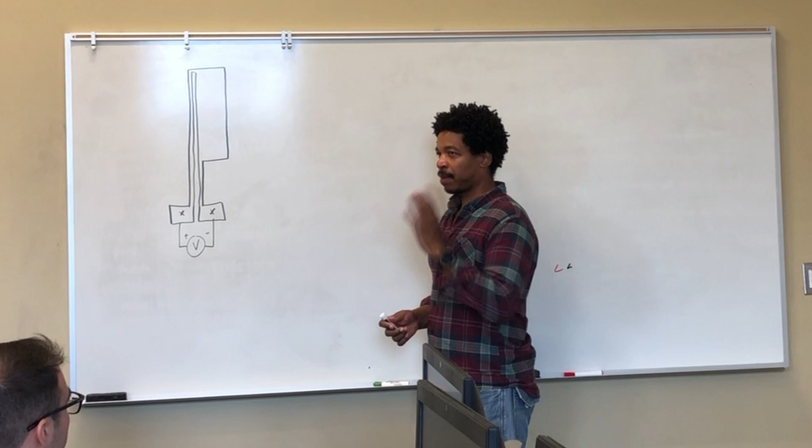But because this is conductive silicon, polysilicon, you're able to send a current through this. It goes around this path, comes back down like that. Now, if you send current through a resistor with a very small cross section, what happens is that material is going to heat up. Okay, so the kind of dimension we're talking about is like this dimension right here is going to be around 2 microns.

Okay, and this beam right here is called the hot arm, and this is called, of course, the cold arm, right? And because this is experiencing a wider cross section as a current goes through here, since you have a higher cross section, then you have less current flux going through this side. Okay, the total current is the same, but the flux is different. Okay, and it comes through here. So this small part right here does heat up, okay, but it contributes less expansion.

So what's going to happen as this beam heats up, it's going to expand this direction. This beam right here, it wants to elongate. This one does want to elongate a little bit. It is receiving a little bit of heat from this side over here, okay, but there is an air gap between those two. But they still call this the cold side, and so it doesn't experience that much thermal expansion.

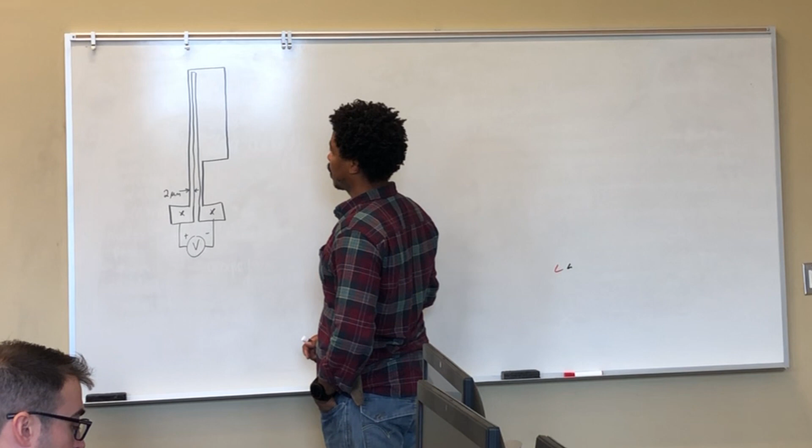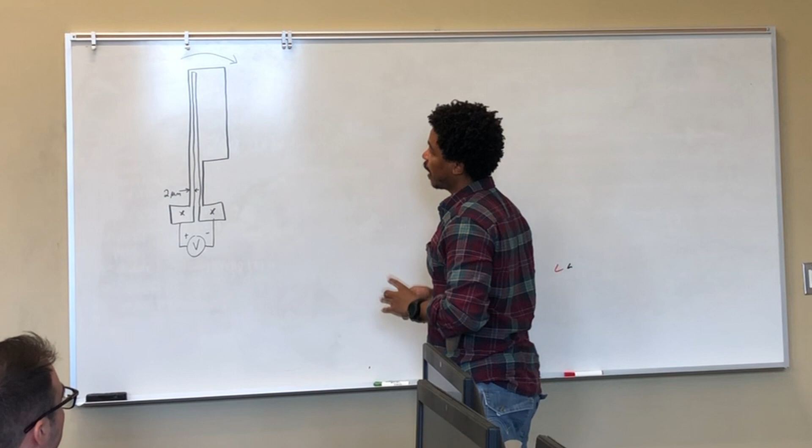So you guys could probably guess what's going to happen as you send current through this thing. Well, let me ask you, which direction is this going to bend, to the left or to the right? Yeah, it's going to be in this direction, to the right. Because, as you guessed it, this side will expand more than this side. If this side expands, the whole thing's going to bend over. Okay, and so that is a thermal actuator.

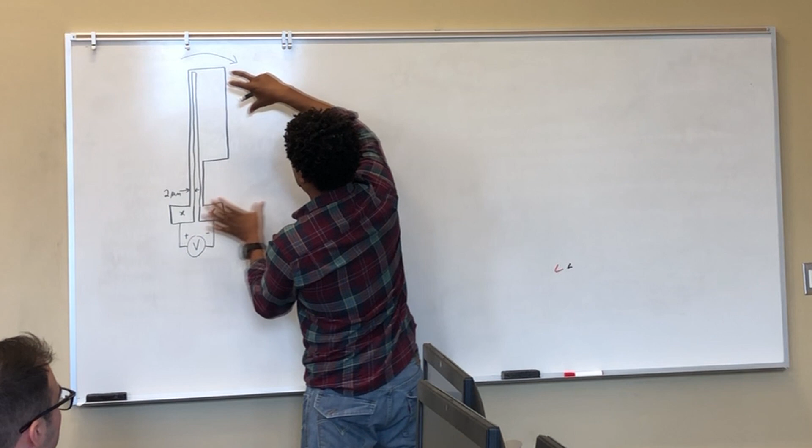Some people, what they've done is chain a lot of these together, where you have another copy right here, another one right here, another one right here, and then they have a beam that connects each one together. So you're sort of like magnifying your force. And it's a pretty substantial force that is caused by that.

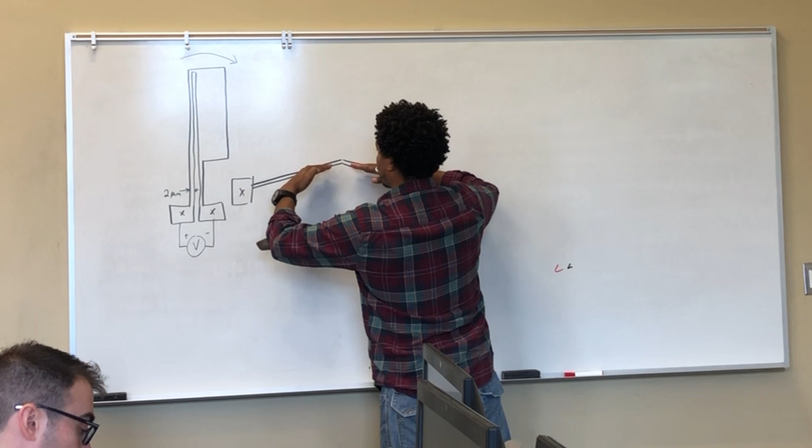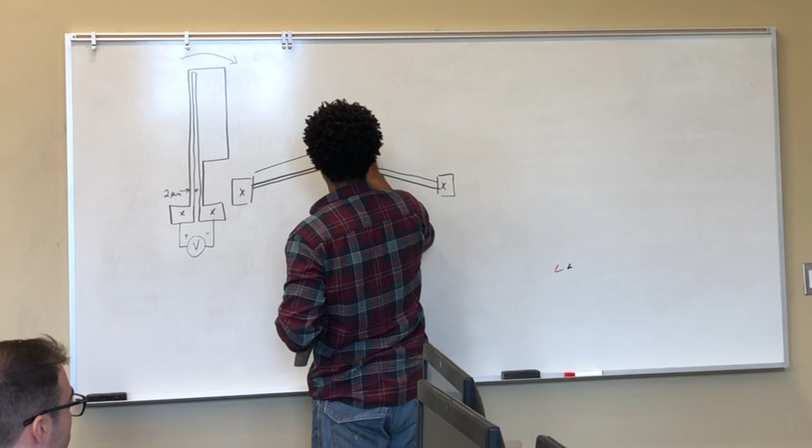Another type of thermal actuator that's very common, some people call this a chevron actuator or a V-shaped actuator. It looks like this. Very thin beam. And then coming down this way like that. And then it's attached to a bonding pad. Okay, and so what happens is when you send a current through this voltage, these will thermally expand, but because it's pre-bent, it has this angle right here, the whole thing bends up like that, okay? And you can have several of them, again, to magnify the strength of your deflection. It doesn't increase your deflection, but it does magnify the force that you're applying if you're pushing on something.

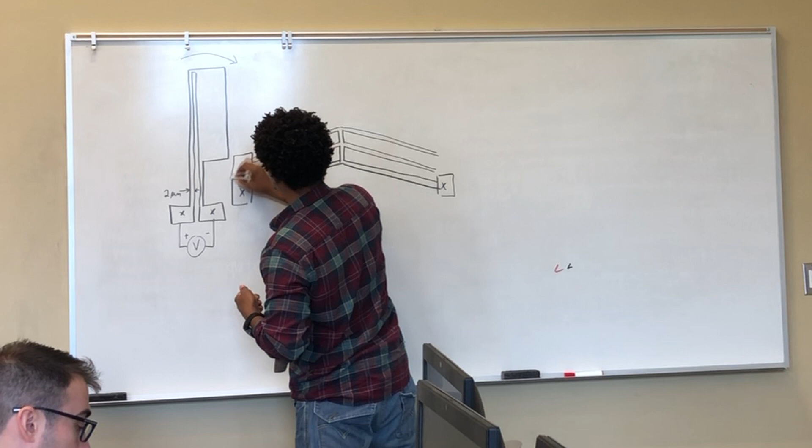Okay, so basically all of these are connected together. And so you're sending a current from this side over to this side, and these currents will heat this thing up, and they'll deflect this direction. So what's interesting about both of these is that you can optimize the deflection per voltage that you put in by changing the gap space. You can modify the gap space. You can modify the width of the beam, right?

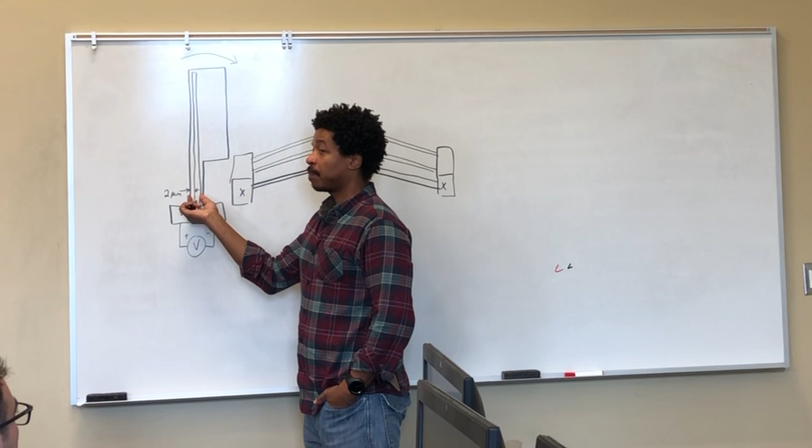You can change the length of this. So let's say instead of having this length, let's say you want it to be a little shorter. So you have this part come down here instead. And so that's something that you guys will play around with after Thursday. And then you'll try to play around, change the parameters, and try to optimize this type of structure. The structure right here, well, this has a certain angle.

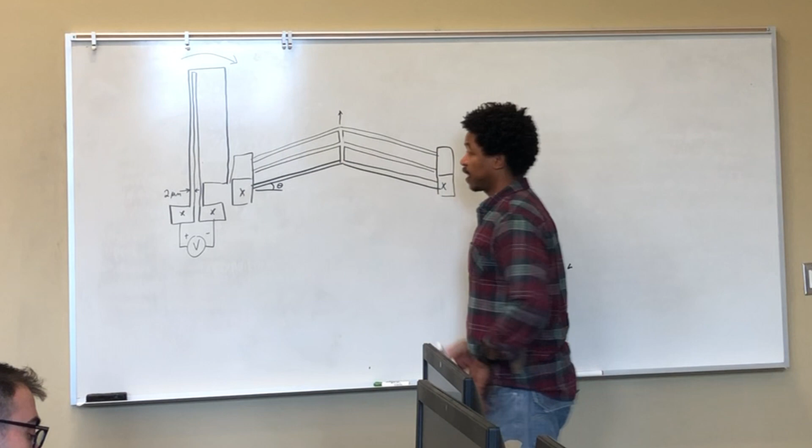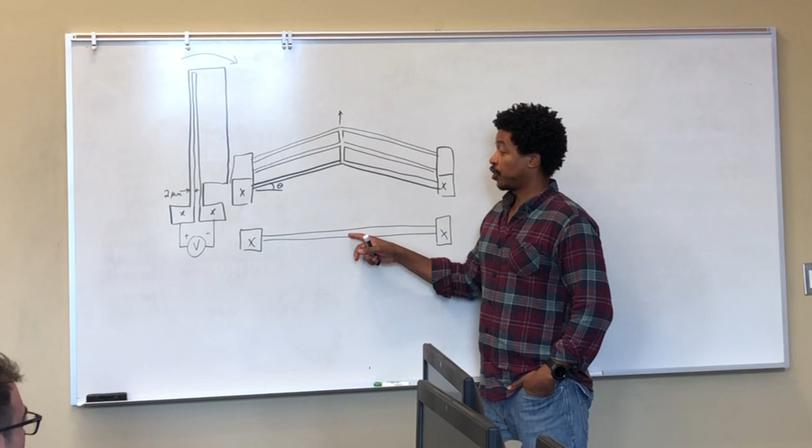And then the question is what angle is this optimized at, right? If the angle is 0, what you have is a beam like this, right? 0 angle. If I were to heat this beam up, and this beam tried to thermal expand, what do you think would happen to this beam? Yeah, exactly. It may buckle. And of course, you don't know which direction it's going to buckle. It's going to buckle up, down, may buckle outward or inward. You have no idea what's going to happen.

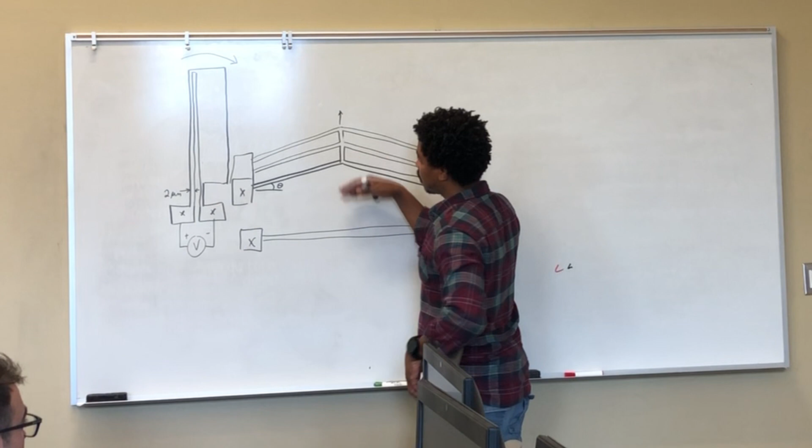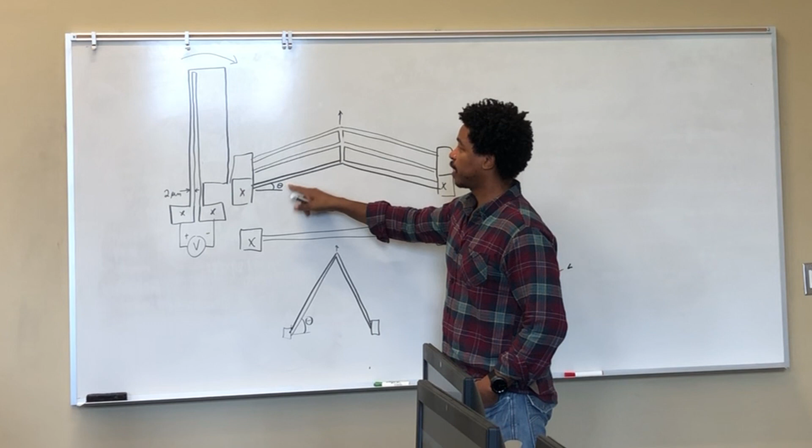Okay, so let's look at this thermal expansion of the beam. Let's talk about a beam here, and let's say this beam is of length L. Sending a current through this beam by applying a voltage across this, you're going to have current and Joule heating, and so it's going to heat up. It's going to increase by some temperature. And the question is how much will it elongate? Let's say it's anchored on this side over here. How much would that elongate? Let's call this lengthening delta L.

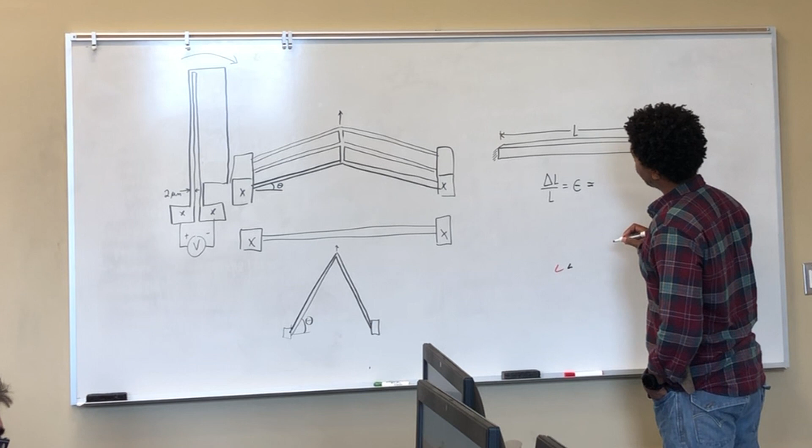So you can say delta L over L, some of you may know that this is equal to the strain, right? And that is equal to alpha times the change in temperature. This is the coefficient of thermal expansion. That's the change in temperature. And the change in temperature is equal to the new temperature minus the reference temperature where it started from. For example, if you started from room temperature and you went above that, it would elongate. If you went below that, it would actually shrink. It would shorten, and you'd have a negative change in L.

Okay, so that's strain. And also, some of you may recognize this equation right here, the relationship between Young's modulus and stress. So here's the strain, here's Young's modulus, here's stress. And the stress is the pressure that's applied here. So this is like the equivalent force over that cross-sectional area, the pressure or that stress right here. And so this is what's happening right here. Effectively, when this thing elongates, it's applying an effective force in this direction, right?

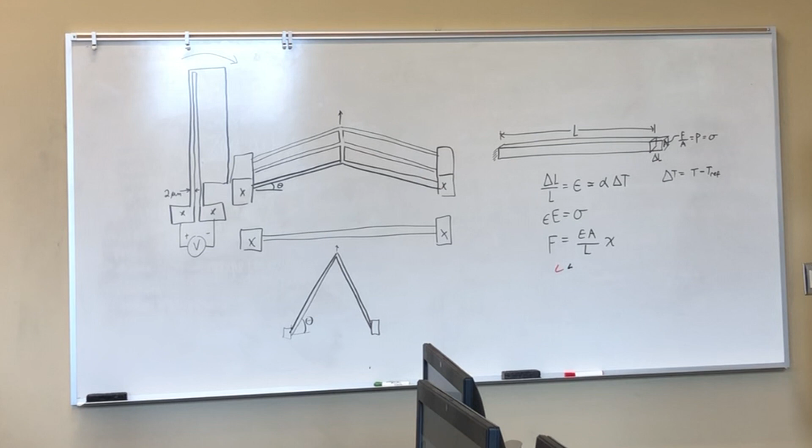And for beams, let's put it in terms of force here. Force equals the Young's modulus times the cross-sectional area A over L, multiplied by its deflection x along the axial direction. We already know that force over A is the stress. So if you divide both sides by A, that A goes away, and so the stress here is E over L times x. Then you can back out what change in temperature took place to elongate that. So this is basically a quick hand analysis of this situation.

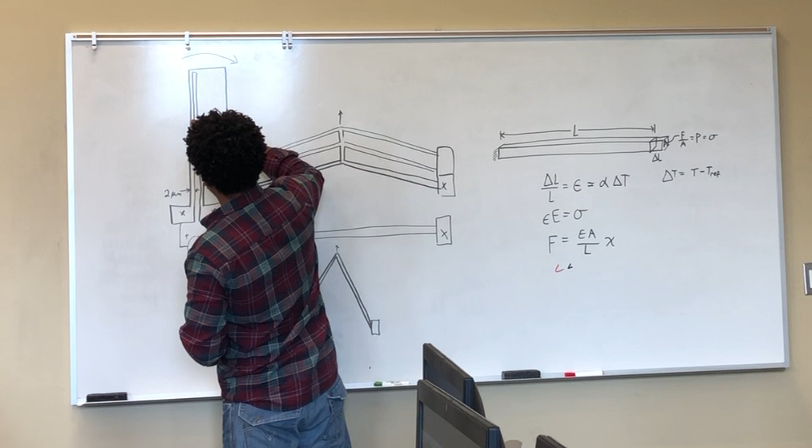When we model it in COMSOL today, we're going to do a little more complicated analysis that's hard to do by hand, right? And we're going to send current through there because that's the realistic thing. When I talked about the change in temperature, this assumes the average temperature along the entire beam. Here, this bonding pad is attached to the substrate, so the temperature here is going to be very different than the temperature here. The hottest part will probably be somewhere around here. It'll cool down a little bit and come around this side. And your simulation is going to figure out where the hottest part is.

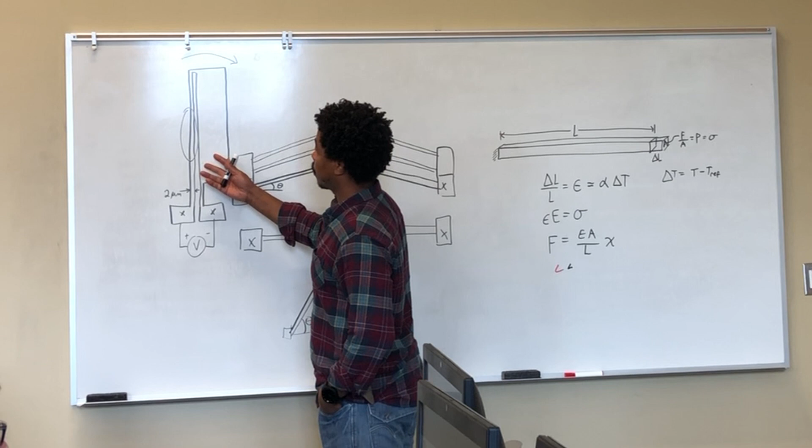And of course, you have to make sure that the current you're sending through doesn't make it too hot, such that it reaches its melting temperature. You want to make sure that doesn't happen. Some people do that intentionally, where they'll make something really small. They attach beams to certain things just to hold it down so it can survive the fabrication process. And then once they have it where they want it, they send a current through to actually sever that beam.

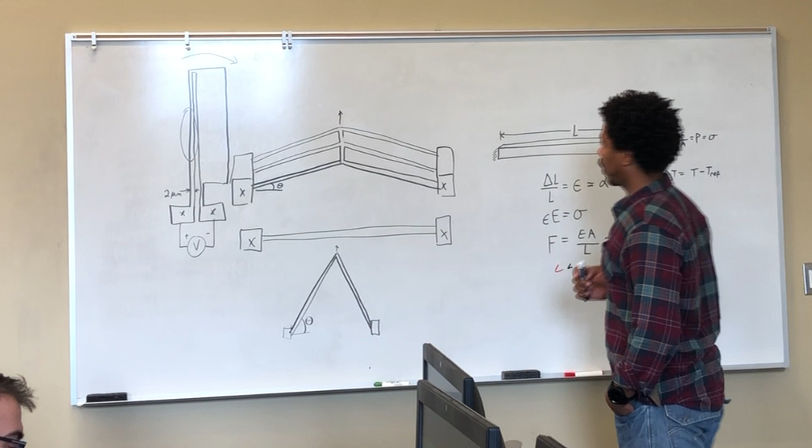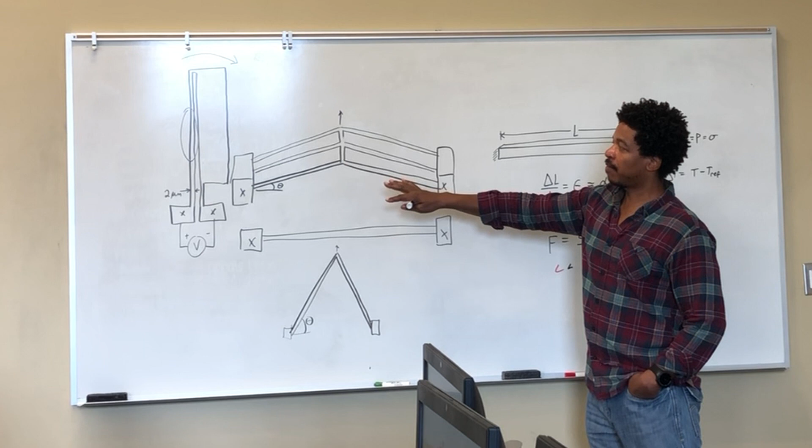The analysis we do today will enable you to determine the temperature at every single point, and it'll enable you to determine the deflection that took place. You'll also be able to play around with the parameters. That's an idea of the assignment I'll give out on Thursday. For today, what we're going to do is model.

It's the same type of physics, but applied to a different type of structure. So the structure looks like this - it's just a simple beam. I'll try to make it in 3D so you guys can see what I'm talking about.

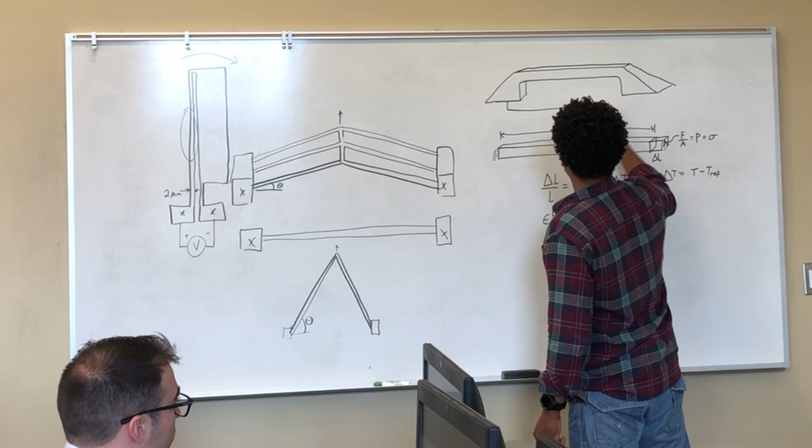So it looks like this, and you're going to put a voltage across that, and send current through this right here. What's going to happen is that this experiences thermal expansion, right? And because of that, this beam is going to do something similar to buckling. I wouldn't really call it buckling, but it is going to bulge out, and it's going to preferentially bulge out in this direction only, upwards, because there's a moment arm associated with it since it's attached to this.

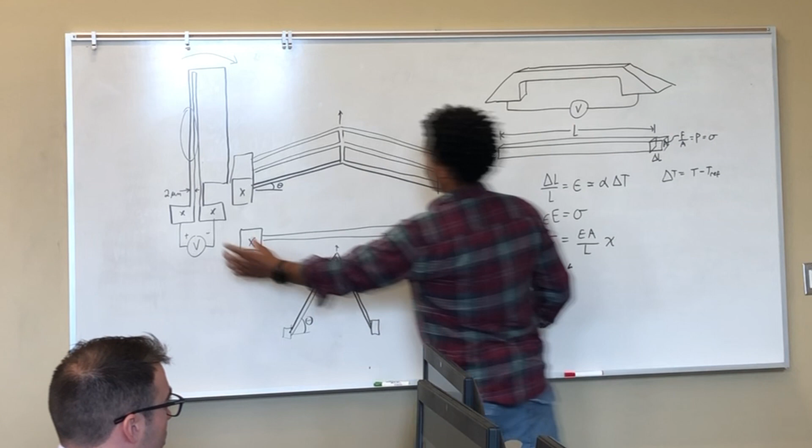So you'll be able to determine what the temperature is all along this right here, and you're able to see the deflection. But this example of what we're doing today is you're going to apply the same physics to a different geometry. The only difference here is geometry - instead of applying a voltage to this stuff, you're going to be applying your voltage across these pads, or in this case, across these pads instead.

Okay, so how's it going? Oh, okay.

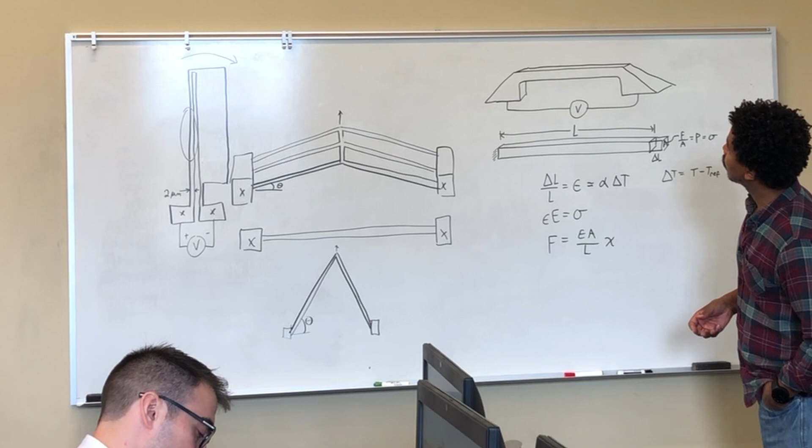So does anyone have any questions about any of this stuff over here? Thermal expansion - it is using multiple physics, right? It has structural mechanics, it has thermal expansion, it has current - you're dealing with current as well, so electromagnetic. Thermodynamics, and also structural mechanics. So 3 domains. Start up COMSOL if you haven't done so already.

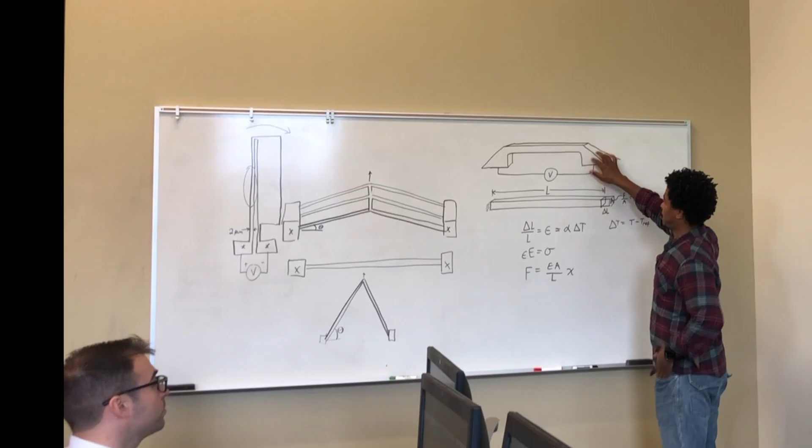So let's go through this. A few interesting things we're going to learn how to do here: this geometry right here is going to be kind of interesting because we're going to learn how to make this geometry by making 2D models. We're going to take two 2D geometries, extrude them, cross them together, and then just keep the intersection. Those geometries are this right here - so this is like one 2D geometry we're going to keep. And this is the same thing, like if you were looking this direction from up above, like that, that's what you would see. But if you extrude it, then it's just a block that doesn't get this.

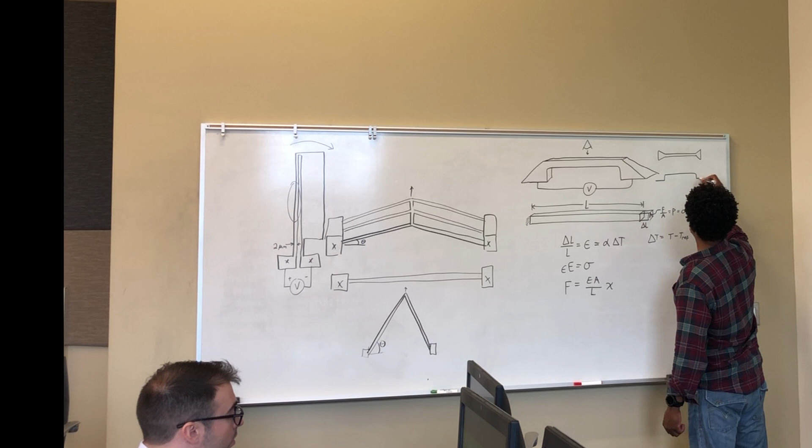But then we're going to have this other geometry that looks like this - so this is another 2D geometry. And that's like looking this direction only into the board, and that's what you would see. We extrude that, take this, put it right on top of that after doing the extrusion, and then we do the intersection, and we get this 3D structure. So that's another really interesting way to make 3D structures - looking at different angles, orthogonal angles, and then doing the intersection. So that's something interesting.

Another interesting thing is, okay, we can do our geometry freehand, but we're going to use vectors. We'll basically just put in the points there, and there's a lot of them. So you'll see that, and then we'll look at the analysis when we're done. We'll look at how the temperature is scaled, and we'll plot the displacement.

Okay, so let's get started. Go to Model Wizard, and this time we're going to click 3D. Even though we're starting off in 2D, you have to click 3D because you're going to end up in 3D. So click 3D, then go to Structural Mechanics, expand that, go to Thermal Stress, expand that, and go to Joule Heating and Thermal Expansion. Then click Add.

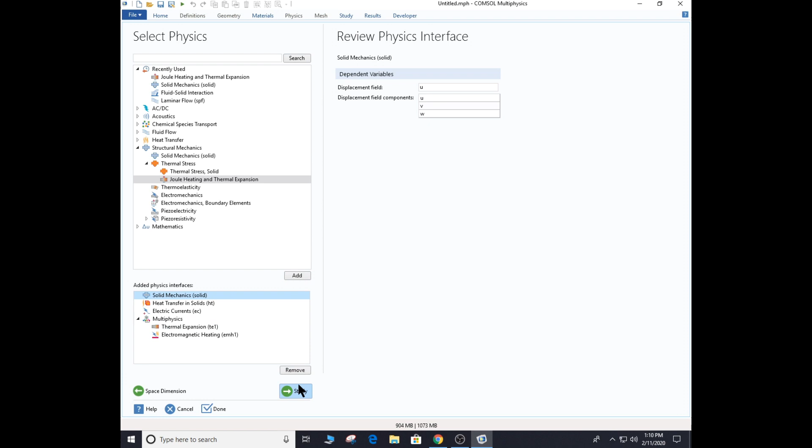Okay, now go to Study, click that, and we're going to do Stationary Study this time, and then click Done.

Okay, so here we are. The first thing we want to do is define some parameters we're going to use for our model. So there's going to be initial voltage, initial temperature, and some external temperature that's far away, which is our reference temperature. And also there's a heat transfer coefficient that we have to worry about. So click on parameters, this opens up, and let's start keying in this stuff right here.

So V0 is going to be the voltage expression, and you tab over, and then that's going to be 0.2 volts, and in your brackets you put capital V for the units. Okay, and that's square brackets.

The next thing is your initial temperature. So T0, tab over, and that's going to be 323 Kelvin. So 323, and in the square brackets, put capital K for Kelvin.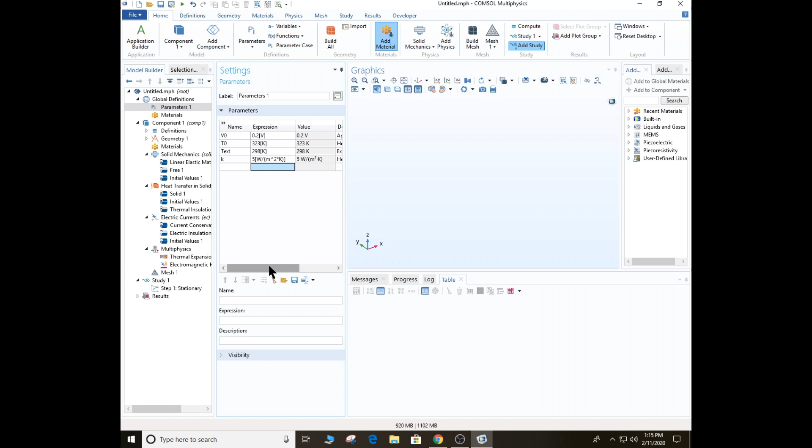Okay, so those are our initial parameters. So the next thing you want to do is go to geometry, and to make things easy for us, instead of always dealing with meters, change your geometry. After you click on geometry, change it to microns. And that'll mean that all the plots will show up in microns, and all the entry data points will be in microns. We don't have to put like E-6 everywhere.

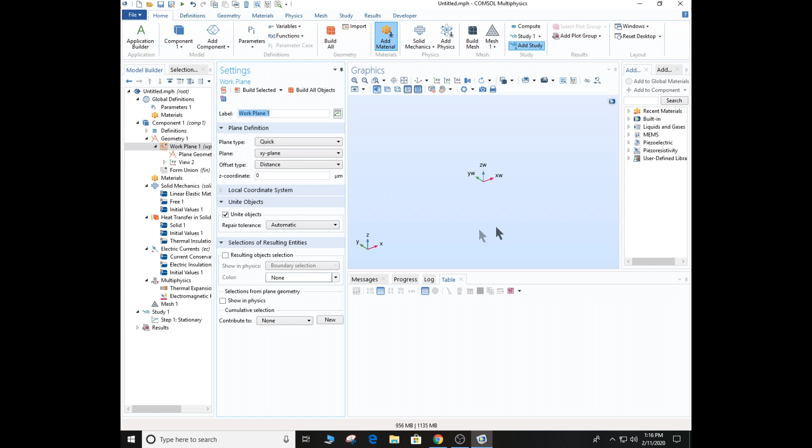Okay, then go to geometry again, and then right-click on geometry, and then click on work plane. So we're going to have two work planes. Here's the first one right here. So you click on work plane, and then this pops up. And so for this right here, go to the plane geometry. So this is it in 3D, but we just want to see the plane that we're going to work with. And as you can see here, it's in microns, micrometers, which is good.

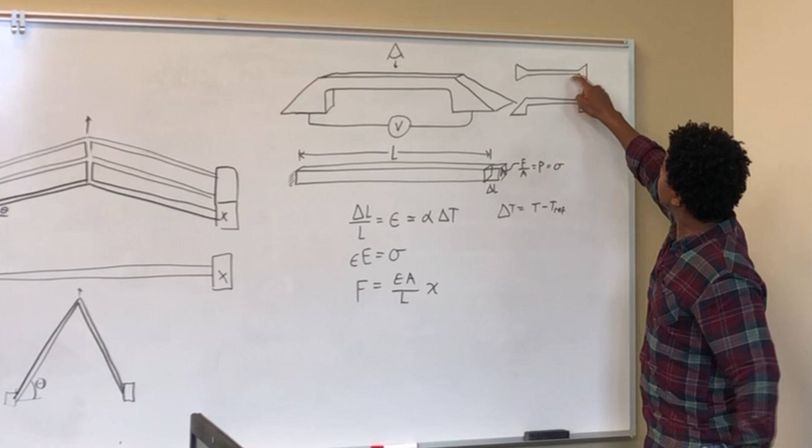And so go over to plane geometry and then right click on it. And we want to enter in a polygon. Okay? That's that first structure. We're going to put this in first. Okay, so we're going to put it in by coordinates this time instead of, I mean, we could just draw it, but we're going to put it in coordinates just to give you guys a different flavor. We're going to put it in terms of points, vectors, okay?

And we're going to put in all the x coordinates and all the y coordinates, okay? But the coordinates are kind of weird, right? So basically, we're going to put it in pairs. Like if you have x and y, we're going to have x1, y1, and then x2, y2. So they're sort of like this. This creates one segment from here to here.

Then we're going to have another pair, but this next pair starts off from x2, y2, then to x3, y3. This is like another segment. And because these two points are the same, they're connected right there. That's how we're going to make our segments, so you'll see lots of points repeat. So you have here to here, then here to here, and another segment going from here to here. It's like that all the way around.

Same with that, except these are curved. It's not an accident of my penmanship—these are actually curved. We'll make these a fillet.

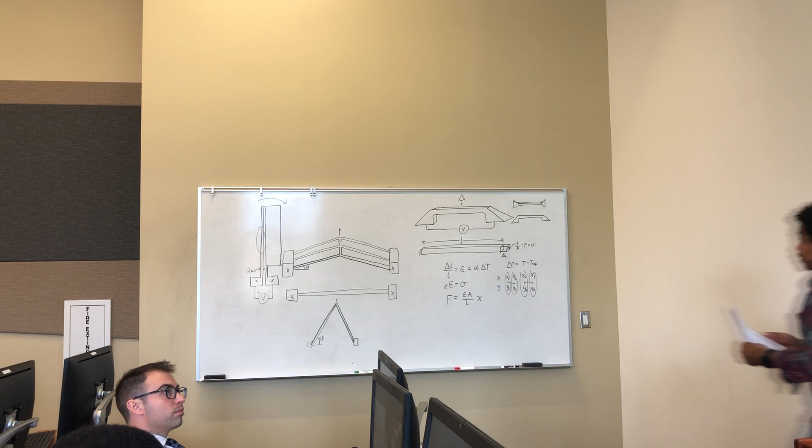Okay, let me write down what you put in because you guys probably can't see it. So I'll put in these coordinates over here. For x, you put in 1, 0, put in 2 5s, you put in 2 18s. Comma separated or spaces—either is fine, COMSOL will take spaces or commas, however you like. And then you put in 4 23s.

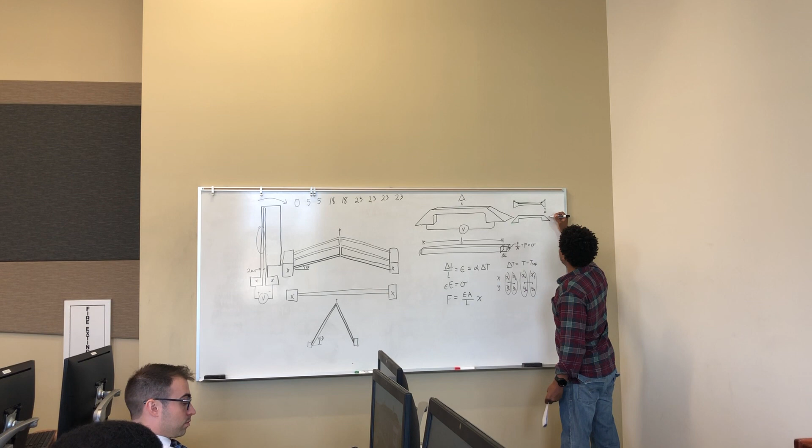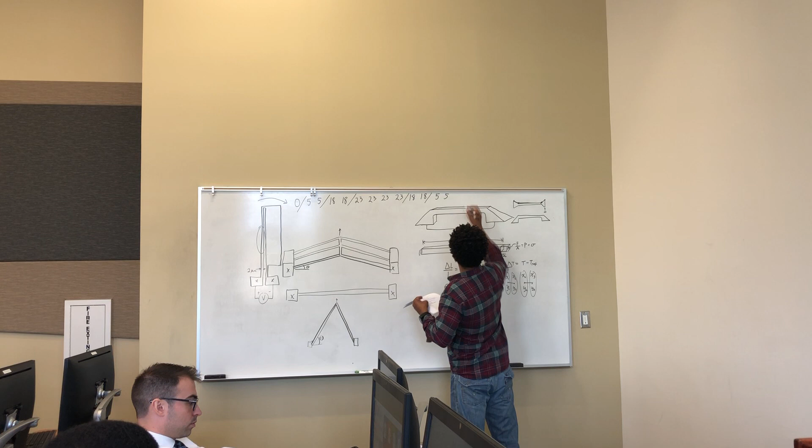So you guessed it, this right here is 23. That's why there's 4 of those, and 2 18s. I'll break these up to make it easier to see, I suppose. And 2 5s, and 3 0s. Hopefully you guys can see that.

That goes in the X entry point. For the Y entry point, we're going to have 1 0, 4 1.5s, and if you guys want, you could probably copy and paste. Once you type in one of the 1.5s, you highlight it, Control C, and then do Control V 4 times. Hit the 4.

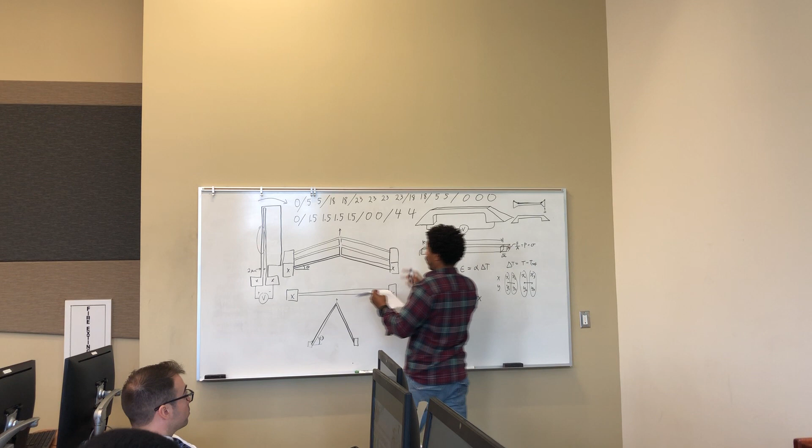2 zeros, 2 4s. I'll continue this down here: 1 and 2, 3, 4. 4 2.5s, and 2 4s, and 1 0. So all this stuff right here corresponds to Y, and all this stuff right here corresponds to the X.

Okay, after you're done with that, build all—hopefully it looks like that. I gotta do it now. So: 0, 5, 5, 18, 18, 23.

I was worried I didn't copy one of the points down correctly. Yeah, it'll complain if they don't have the right number—like the number of y's have to equal the number of x's, of course.

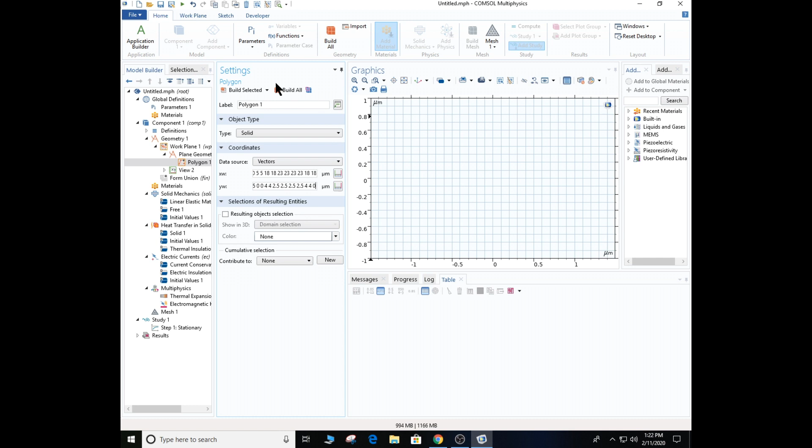Yeah, and then do zoom extents to see the whole thing. Okay, so it should look something like that.

Okay, cool. All right, so let's go to extrude. The extrusion is not on 2D, it's in 3D, so we have to go back up here to the 3D, highlight, right-click on geometry, and then go down to extrude. Okay, and then we're going to extrude this. You highlight the thing you want to extrude, and extrude it up 3 microns, and then do build all. It should look like this.

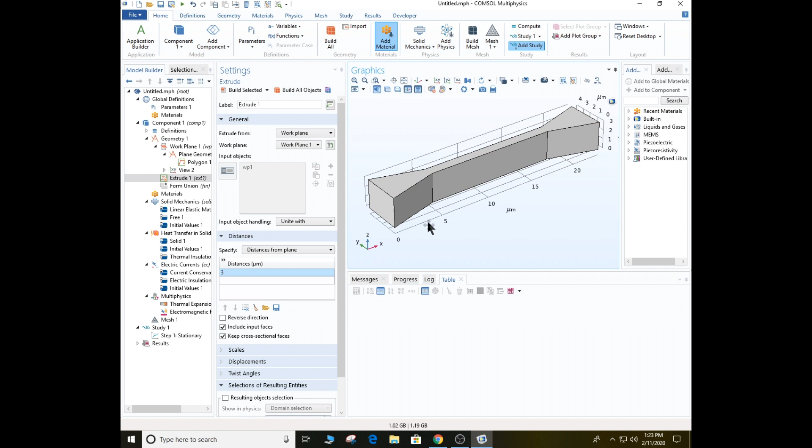So next we want to do the next one. We just did this—we extruded it. Now we're going to do this one.

So we go back over to geometry, and we're going to put in... oh wait, first, okay, yeah, this is going to be interesting. So we want our next geometry to line up with this face here, and extrude from this face that we're going to place out to here. That's going to help us with our overlap. So I'll show you how to do that.

So go back to your... let's see here. Yeah, go to your work plane, and for this right here, go down and put face parallel in the plane type, because you want your plane to be parallel to some kind of face, right? And you click on this one right here. Oh, wait a minute, that's not right. Oh, what just happened?

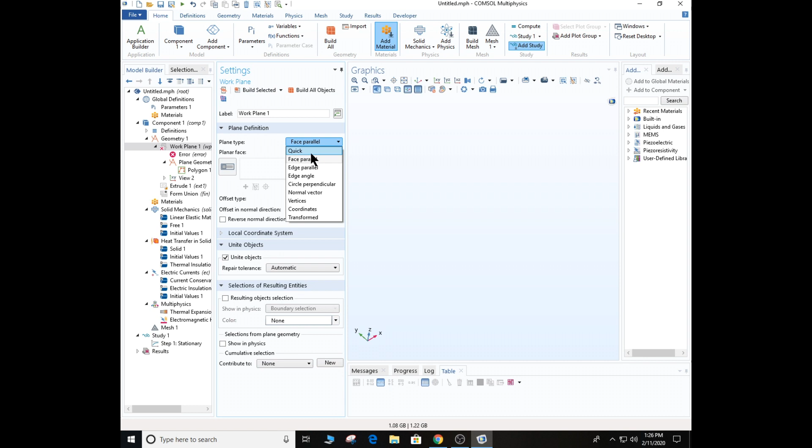So I have that—geometry. Oh, I heard, yeah, this is supposed to be a new work plane. Yeah, my bad. Okay, so whatever you did, yeah. So go back to geometry and click on a new work plane, and then for this new work plane, you go to face parallel.

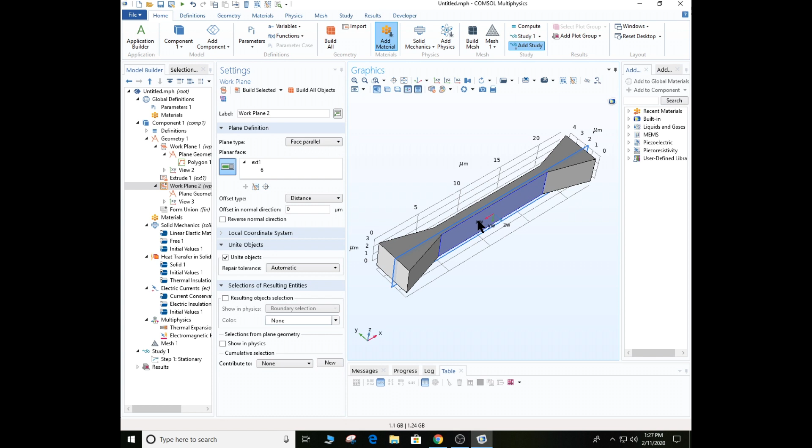And then you click on your face, and it should look like that. You guys got that? Everybody? Good, okay. Huh? Oh, and the last part? Probably got to hear because you get what I did. Oh, yeah, yeah, so go back to that. And go to.

Okay, so as you can see, that plane is intersecting that face right there, but we want to extend it out to here. Okay, so we're going to displace that. So go to offset right here, and then click in here negative 1.5 to offset it, right? If we do build all, it went that direction, but we don't want that direction. So you want to click on reverse normal direction, and then it'll put it where you want. And as you can see, it's flush with this side right here. You guys see that? That's exactly what you want.

And so we're going to build a geometry on this plane here, and then extrude it through the Y direction. Okay. Oh, yeah. So here's the difference between reverse. It gives you a different kind of positive sense, right? So if you click back and forth, it's like that. Like, are you going 1.5 microns this direction, or 1.5 microns out that direction? And that's what that does. It gives you a choice of what direction you want to go.

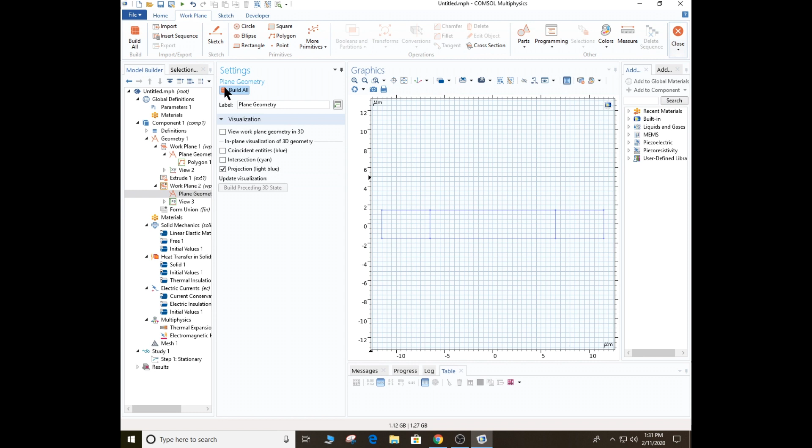And then turn off that and turn on this. And these are coincident entities. And I'm not sure what that is. Okay, but anyway, so let's go to projection. That's the only one we need. Okay, and we will go to view the plane here. Oh, wait a minute. Yeah, so what we'll do here, right click on plane geometry, and then click on polygon. And we're going to do the polygon again to make this other structure. And I'll write it down again. Okay.

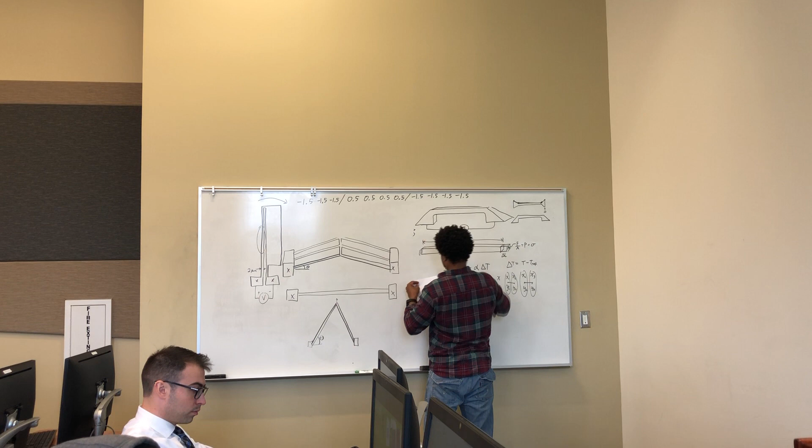So our new numbers are going to be 1, 2, 3. There are 3 negative 1.5s. Okay. There are 1, 2, 3, 4. There are 4 0.5s. There are 4 negative 1.5 again. This time 4 instead of 3. And there are 4 1.5s. And last, we only have 3 over there. Here goes the last one, negative 1.5, one of those. That's going to be the x's.

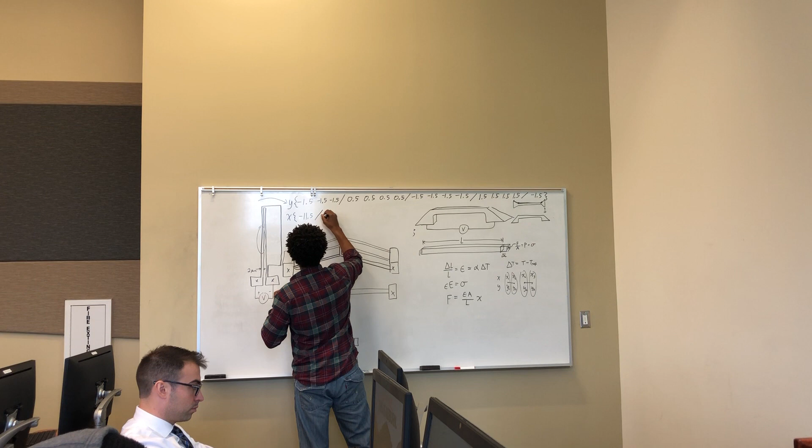And then we have 4 positive 6.3s. Okay. Then we have 2 11.5s positive. And then 2 positive 6.5s. And 1 negative 11.5. And it should look like this without the fillets when you build all. Anybody got lucky? Oh, wait a minute. Did you guys put this in vector form? Yeah. Okay, thank you. Glad you remembered that.

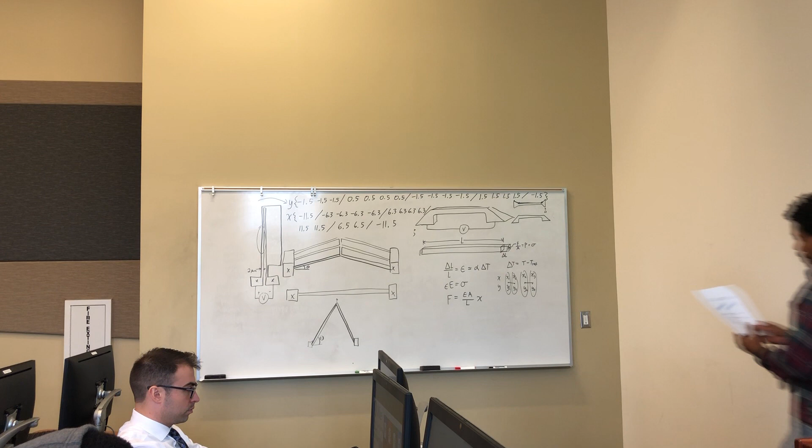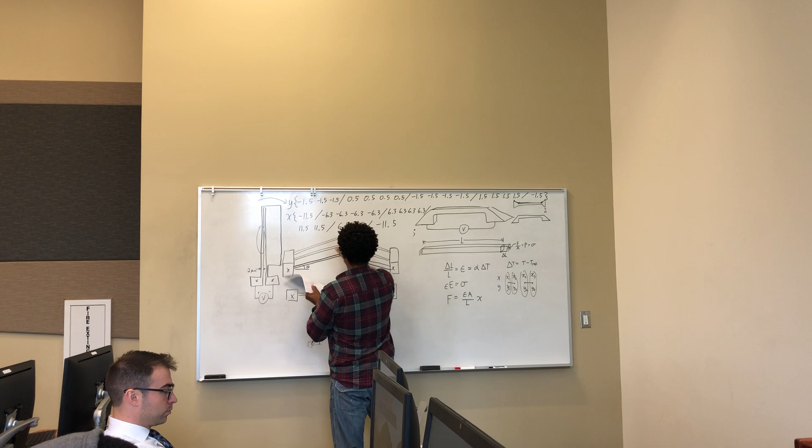Okay, negative 1.5 times 3. Yeah, same. Everybody's getting an error? Let me check my numbers, maybe I'm missing something. For the x's, like that. 1, 2, 3, 4. 1, 2, 3, 4 this. 1, 2, 3, 4 that. 2 11.5s. 2 6.5s. I did miss something. There's supposed to be 2 things here before the negative 11.5. There's supposed to be 2 negative 6.5s. Yeah, this is a problem if you don't have the right number at the top. Okay, so how's that? Still errors? You're right. Okay, great. Glad that was the only error.

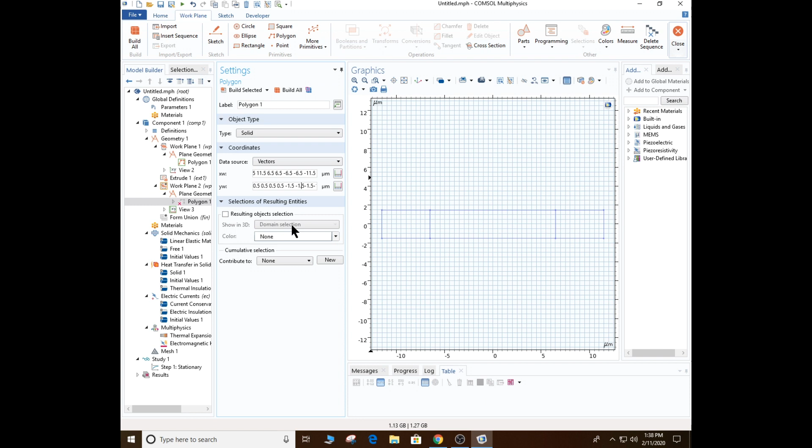I have a little bug in mine. I'm trying to find out where that is. 1, 2, 1, 2, 1, 2, 3, 4. I didn't have a space between one of my things. There we go. Okay, so I finally caught up with the rest of you guys. So this is what it should look like.

Okay, when you do build all, and then next we're going to go to fillets. So right click on plane geometry for work plane 2, and then go down to fillet, and it'll add that there. And what you can do is come over here. All the vertices are now dotted, and so you have to select which one you want. So you can do a select box and highlight these middle 2 like that, and then they appear over here. So 4 and 6 of mine are what those middle 2 are.

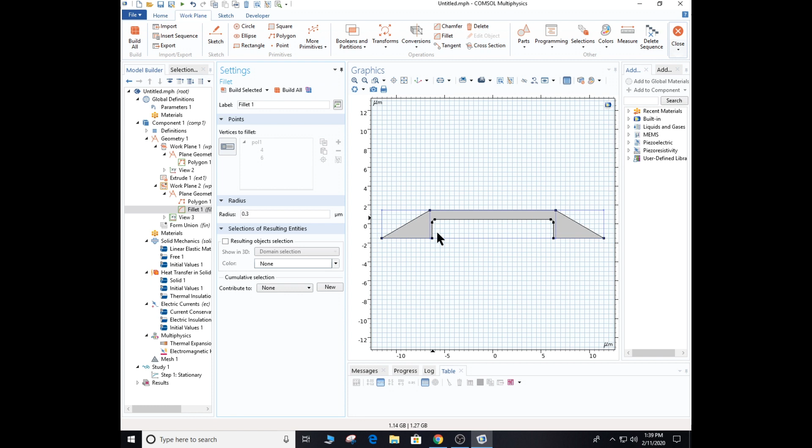And then the radius of curvature is going to be 0.3 microns. Okay, then you do build all, and then you can see they made those curved. Okay, and next you go out to geometry again, and you right click on geometry, and you want to extrude it. So we're going to do extrude, and this is the one you want right here. Oops, I'll click it again. So this is the one you want, and you want to extrude it for 4 microns. So from this distance to over here is 4 microns, and so you say build all.

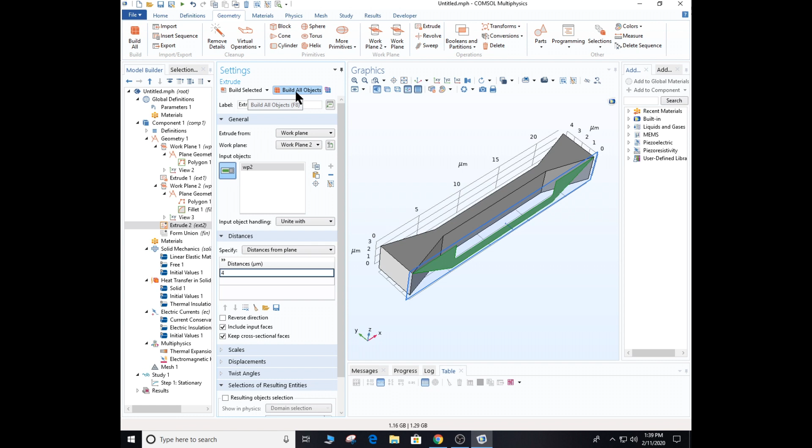-4 on mine. I must have changed my, yeah. Okay, so it's either 4 or -4 microns, but it should look like this. Okay. Next, what you want to do is you want to do a Boolean. So you go to your geometry, and you go down to Boolean, and then you go to intersection. So this is where you get the part that you want,

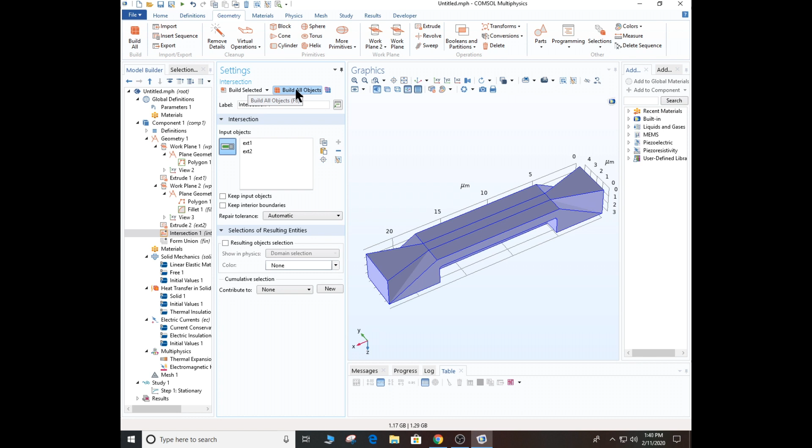and you just click on the things you want to do intersections with. Both of those, you can do Control A, and you don't have to keep the interior boundaries. And then you can say build all. And so it should look like this once you get done. So how are we doing out there? Everybody got this? You can also go to Form Union and do build all there too.

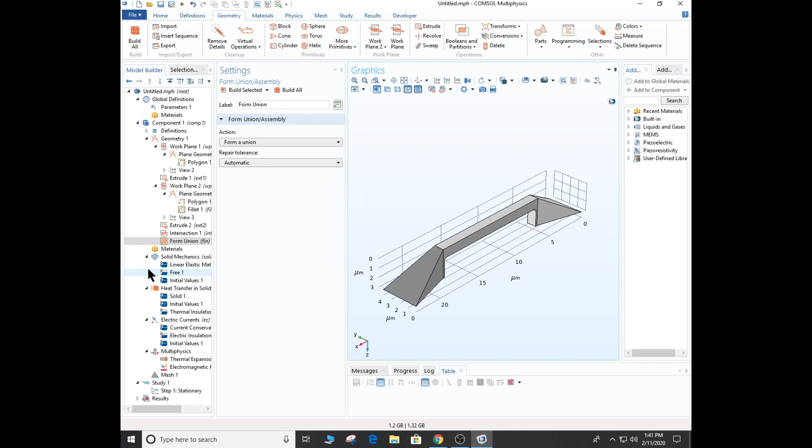Okay, so now what we're going to do, this is something that you guys can do to try to name some of your boundaries. You can name them, right? So these bottom boundaries right here, those things are connected to the substrate. So we're going to call one of them connector 1, another one connector 2, and then we're going to call both of them just connectors. So that means that you can select them, and they will appear in a drop-down list, or you can just click on the boundary if you want to. So it's up to you, but you can give names to your boundaries, and sometimes that makes it a whole lot easier, especially when we start building your standalone apps.

Okay, so let's go down to definitions, which is right here. You right-click on it, and then you go to, where do you want to go? Oh, selections, explicit. You want to explicitly define a selection. And we could pick domain, but we're going to pick boundary. You can also pick an edge or a point and just name anything you want. So for this first boundary, this is the one we want right here. And we're going to call this connector 1. And as you see over here, it's now called connector 1. If you expand this out right here, you can see that's called connector 1.

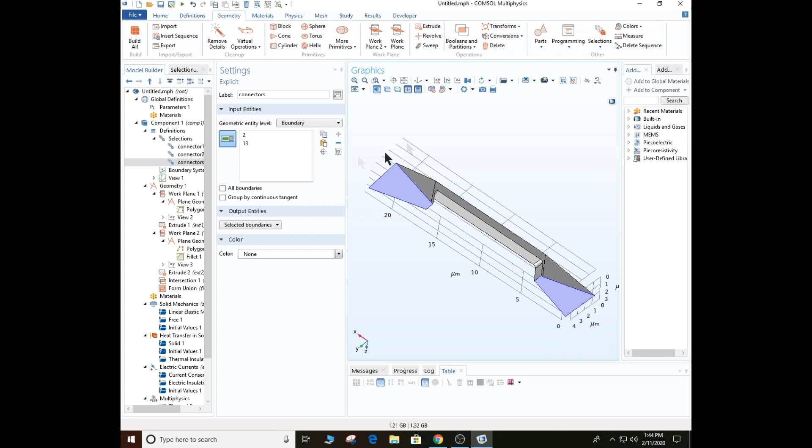Okay, so once we're done with that, then we're going to add our material. We're going to make it copper. So you can go to home and you can go to, where's add material? Oh, right here, add material. Oh, it's already showing. So add material. Go down to choose MEMS. Go down to metals and then choose copper. And then click here, add component. So you can either double click on it or you can click it once and just say add component and it'll pop up over here.

Okay, but one thing it doesn't have yet that you have to tell it is the relative permittivity. And for now, we're just going to call that 1 for our relative permittivity. Okay? Everybody got that?

Huh? I don't have the relative permittivity combined with that at all. Oh, but you have all these other things? Yeah. Wow. Let me see yours, what yours looks like. You took copper and MEMS, right? Added a bunch. Oh, you did? Yeah, so these added. Oh, okay. Okay, so that's relative permittivity, right?

Also, let's go to material properties, and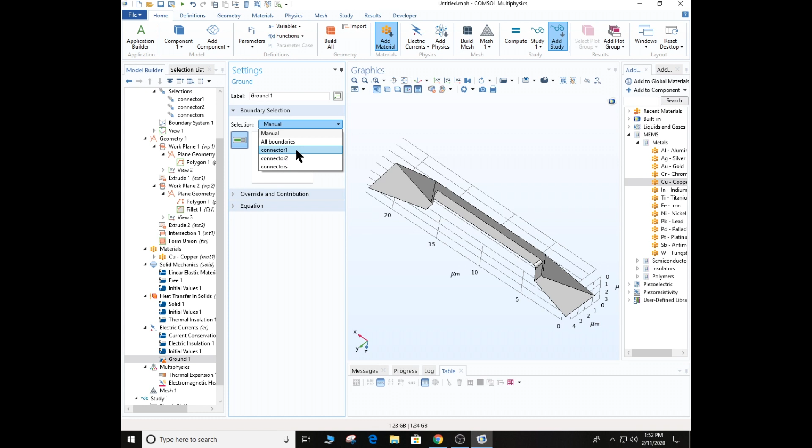Okay. Now for the next thing, let's go over to electric currents, and then we're going to tell it which thing is the ground and which thing is receiving the voltage. So right click on it, select ground, and then go to here, and you can see what connectors you have. Remember, those are the ones that we labeled before: connector 1, connector 2, and connectors. So select connector 1, and that's going to be our ground.

Let's go over to electric currents again, right click on it, and this time choose electric potential, and then go over here to select connector 2 for the electric potential. And since that's not 0, we'll put in what we chose, which was V0, and that was our 0.2 volts that we created in the parameter section.

Okay, so now let's go over to the multiphysics section down here, and let's go to the thermal expansion part. Okay, now here what we'll do is we'll go down to model input right here, and for this we'll say user defined, and right here we'll put in our T external, and that's a parameter that we had defined. Otherwise we could just type in the number.

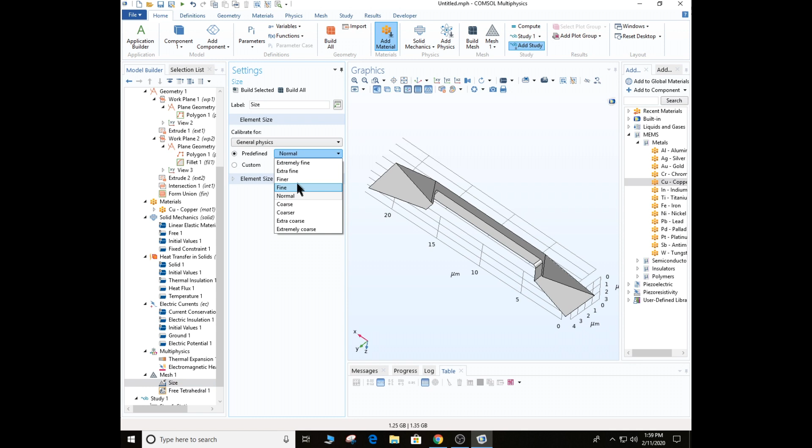Now let's go to our mesh down here at the bottom. So right-click on mesh and do our free tetrahedral. But first go into size, and the kind of size we want is going to be finer. Not fine, but finer. And then say build all, and it'll build the mesh for you. It should look something like this. Okay?

Now we can just do our study. So go down to study, click on that, and then click on compute. And then in a few seconds, hopefully, you got a result. So here's what this result looks like over here. And you can see that it bulges up.

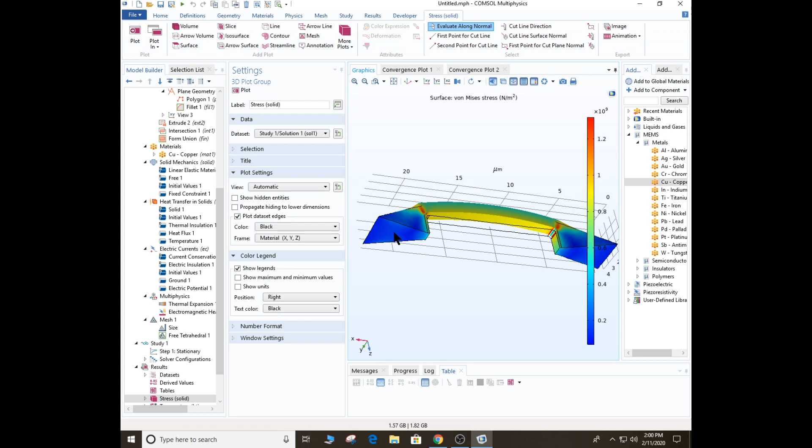Okay, so remember, this over here is ground. This over here is at 0.2 volts. Both temperatures here on these bottom boundaries are at temperature T0. However, the temperature all throughout here is determined by the current going through here. What's being plotted is von Mises stress.

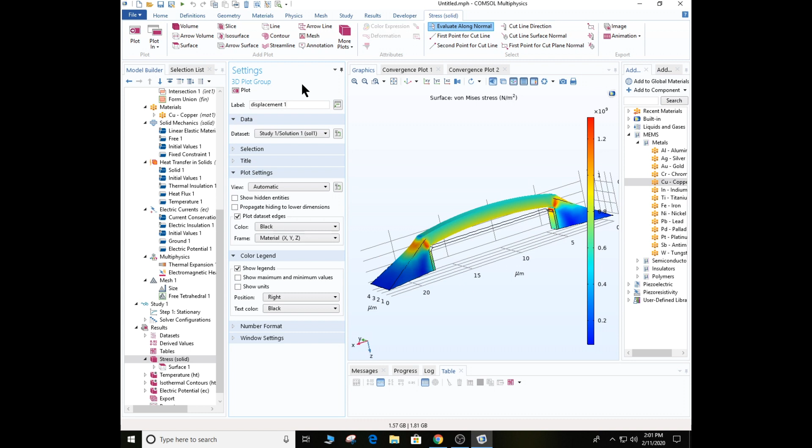Okay, so we're going to change that a little bit. So let's look at stress right here. Let's go to surface, and oh yeah, we're going to do two studies. So let's call this first one... wait a minute. Okay, so go back up to stress solid. Instead of labeling it stress solid, let's call it displacement study 1, or displacement 1. And we'll have another displacement 2 when we go back and change the alpha. Okay? And once you do that, it should change this to displacement 1.

Then go down to surface right here. And you want to go to... where do you want to go to? We're looking for something called replace expression. I lost my bearings here. So we go to results, displacement study. So if you go back and replace expression, then there's a button up there. Where do you see that? You go to surface. Uh-huh. Click on that, and then there's the red-green arrow button. Ah, yes. Thank you for that. Yeah, forgot about that.

Yeah, so if we go to that, go down to solid mechanics components. And then click on displacement, and then click on this one right here. So this is telling COMSOL to plot displacement instead of the stress. Okay, you can double click on that. And then you can say plot. And now, as you can see, the plot has changed. Now it's plotting displacement. And in fact, if you click anywhere on this structure, it'll show you the value of that displacement right here. It tells you the coordinate and the value on the plot. Okay.

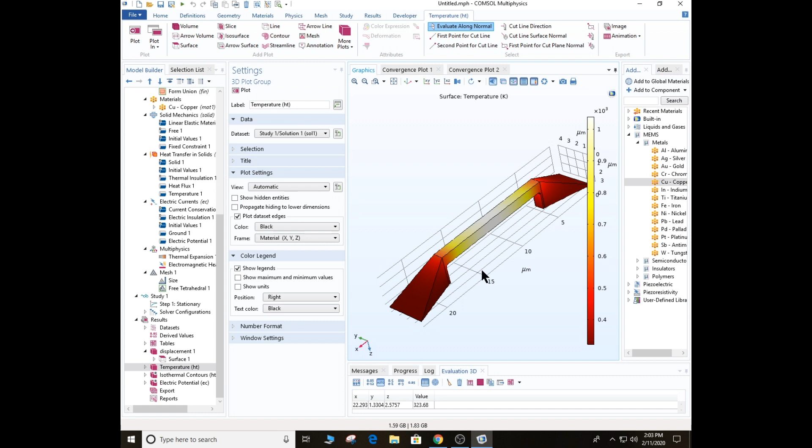Okay, so now we want to show what the temperature is. So let's go down to temperature right here. If you click on that, it'll show you what the temperature looks like. And you can click on it. It's hottest in the middle right here. So it's 1,000 degrees K. Over here it's like 323 K. In here, 323 exactly. Because remember, those were our boundaries that are connected to the substrate.

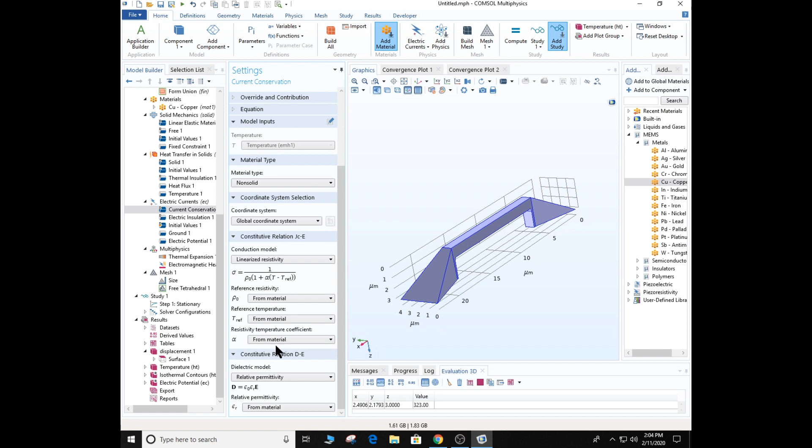And now let's go back to our electric currents right here and change our alpha. So go to currents, go to current conservation 1, which is right here, and then scroll down to alpha, and then say from material instead of user defined. And then go to add study. Did it add it? Oh, add study. Okay. So when we say add study, this new thing pops up. We say stationary, and then we click on add study. So this is going to be another simulation. And then we come over here and say compute.

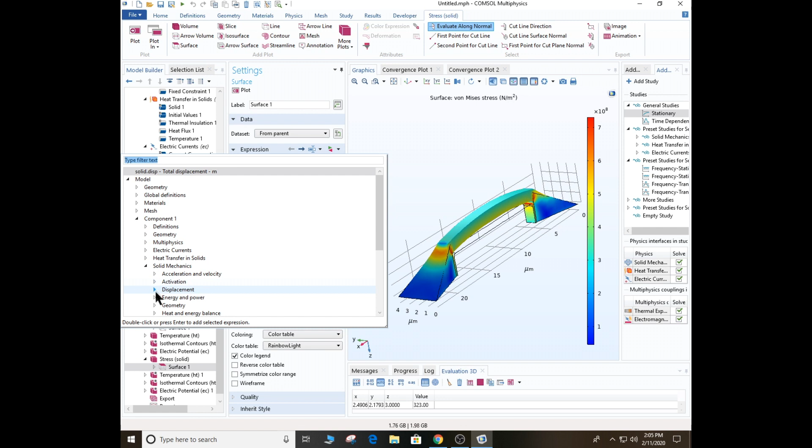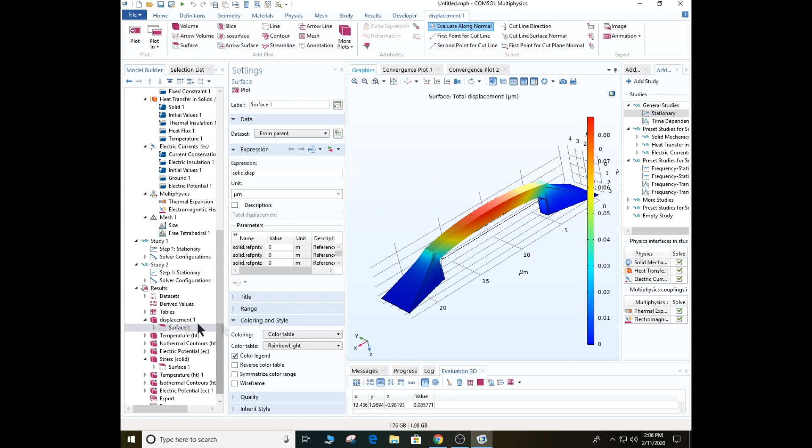Okay, so this is what we get for that. And again, if you want to go down to the surface, click right here, and then you want to do the geometry again. You go to solid mechanics, you go to displacement, and you want to plot total displacement. Double click on that, and then you say plot it. Then you'll see what this is. So this is the displacement with alpha being chosen by the material. And if you click right here, you see that the deflection is not as high as the other one. If you click on this surface, you get a different value. Okay?

And of course, what you can do here is call this displacement 2, just to make it clear. So displacement 1 is up here, displacement 2 is right there. And you can also look at the temperature as well, and those are also different. This value for temperature is 1038. Right here for temperature, we get like 705. A little different. Okay, but this is a more accurate model where that coefficient really depends on the material, because it's a function of temperature. Okay.

Anyway, that's all I have for today. Again, everything we did here, I hope that you can see that you can clearly apply it to this or this. The only difference is it has different geometry. That's it. Okay? But everything that we did here can be applied to those two things. But again, that's not until Thursday for that assignment.

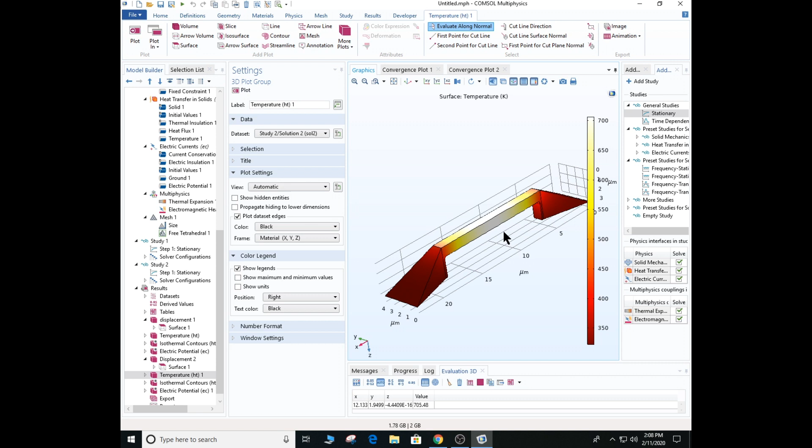Come on, Matt. Yeah, that's totally my problem. We're definitely going to report this over to IT. Right? So we have this problem on Tuesday. I mean, on next Thursday.